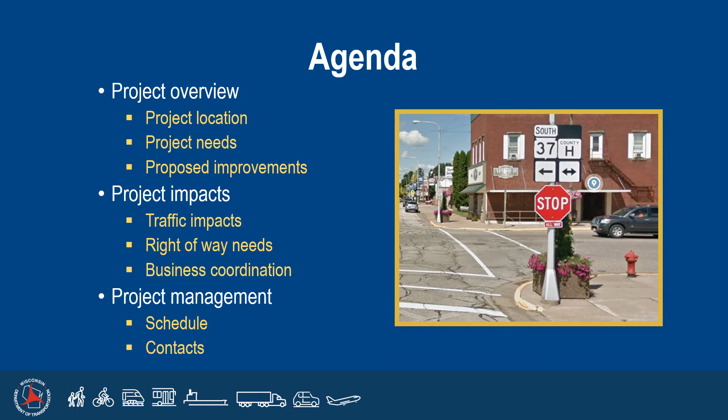The agenda for this presentation is as follows. First, we will start with an overview of the project, going over the project location, why the project is needed, and what improvements the project will include. We will then discuss the impacts of the project, including traffic impacts, right-of-way needs, and business coordination. We will wrap up the presentation with the project schedule and contact information.

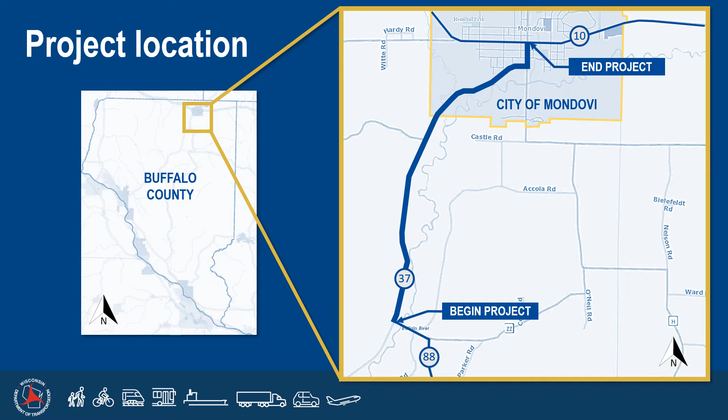The proposed project is located on Wisconsin 37 in the northeast corner of Buffalo County in the town and city of Mondovi. The project will begin at Wisconsin 88 and extend north to US 10, locally known as Main Street. The project is roughly 3.5 miles in length. The project is split into 3 sections, a rural section, which has ditches for drainage, and 2 urban sections, which handle drainage with curb and gutter.

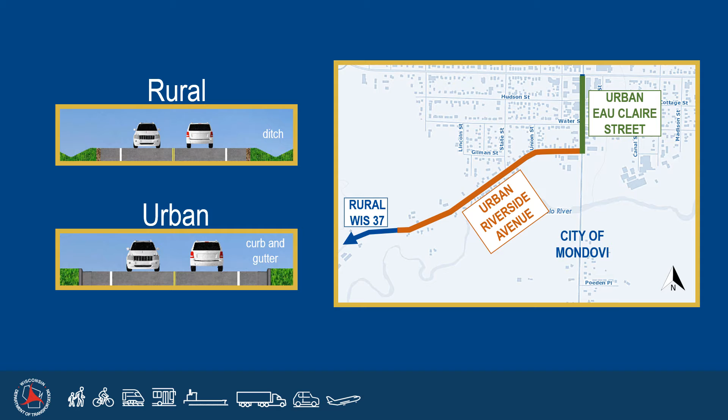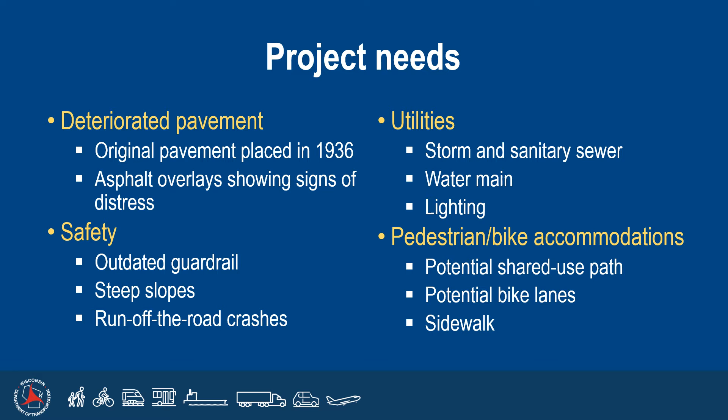The primary need for this project is to address the condition of the deteriorated pavement. The original pavement was placed almost 90 years ago in 1936. Over the years, there have been multiple overlays and maintenance projects, but the pavement is at the end of its service life. In addition, there are several safety needs. The existing guardrail is outdated and should be replaced, and steep slopes along the rural section need to be better protected. There is also a history of run-off-the-road crashes along the rural stretch of the project. Widened shoulders and rumble strips could help reduce the potential of these crashes. Other needs involve replacing the underground utilities and lighting in the urban sections of the project, and addressing safe pedestrian and bicyclist accommodations along Riverside Avenue and Eau Claire Street.

Next, we'll discuss the proposed project improvements. Some are still being evaluated and may or may not be included in the final design. In addition, design elements within the City of Mondovi are still being discussed and considered by the city. To address the needs of the project, different improvements will be included in the different sections of the project. In all 3 sections, the existing pavement will be replaced with concrete pavement. Along with the pavement replacement, the rural section, which is just over 2 miles, will include widening the paved shoulders from the existing 3 feet to 5 feet, adding shoulder rumble strips, installing new guardrail, and regrading the slopes at various locations.

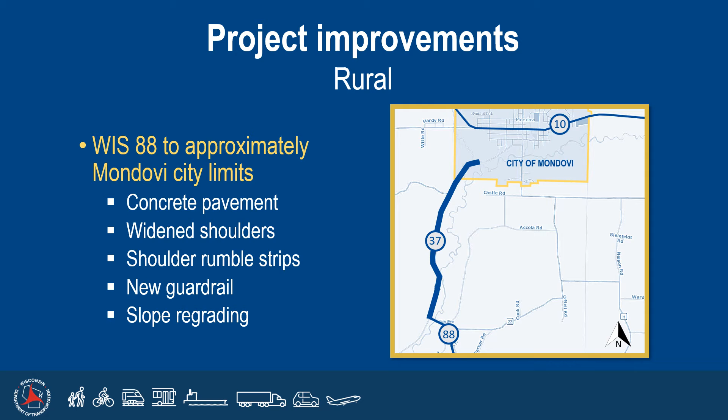The next section is the urban section along Riverside Avenue, which is just over 1 mile in length and begins at the approximate city limits and ends at Eau Claire Street. Along with the pavement replacement, curb and gutter will be replaced and a potential shared use path is being proposed along the south side of Riverside Avenue. The shared use path would provide improved pedestrian and bicycle accommodations and connectivity with the city. To make room to incorporate the potential shared use path, the roadway would be shifted within the existing right-of-way, and the existing parking lane on the south side of the roadway would be removed.

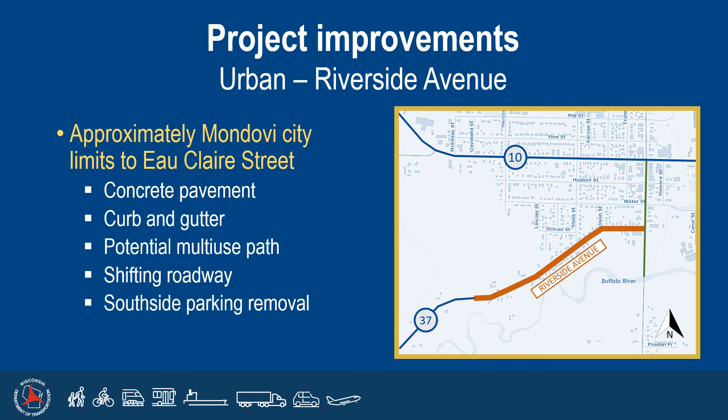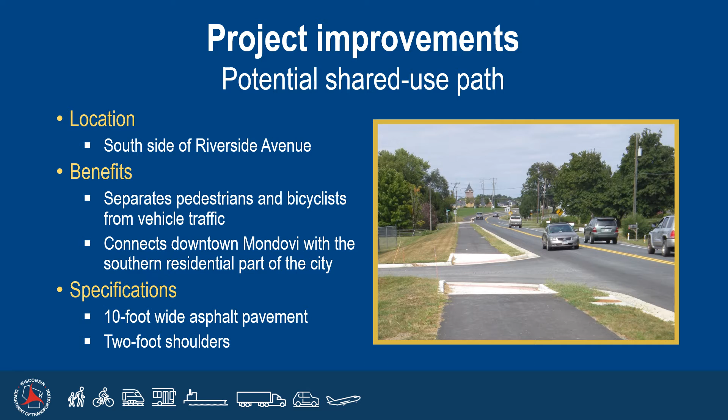The implementation of a shared use path would provide a safe accommodation for pedestrians and bicyclists that is separated from vehicle traffic. It would also provide better connectivity between the southern neighborhood and downtown Mondovi. The proposed path would be a 10-foot wide paved asphalt surface with 2-foot grass shoulders on both sides.

The last section of the project is the quarter-mile urban section along Eau Claire Street. Along with the pavement replacement, curb and gutter would be replaced, potential on-road bike accommodations would be included, and the intersection of Riverside Avenue and Eau Claire Street would be updated to better accommodate truck traffic. Currently, the only place along Eau Claire Street without sidewalk is on the east side between Riverside Avenue and Water Street. Sidewalk may be added along here. In addition to sidewalk along this section, bump outs are being considered.

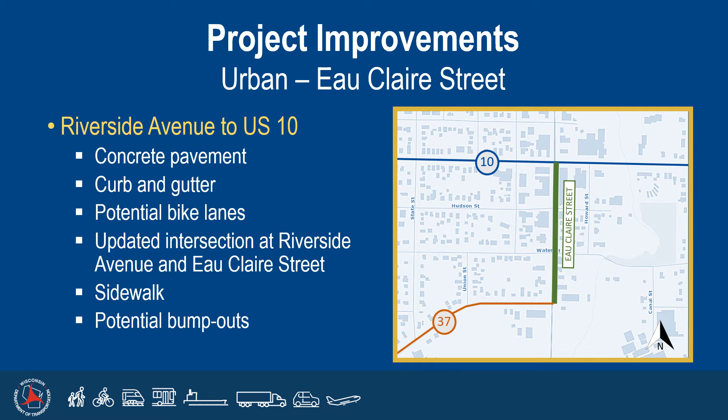The considered bump outs would be located at two intersections, Water Street and Hudson Street. A bump out is essentially widened sidewalk areas that create safer crossing conditions for pedestrians. Having a bump out provides pedestrians a refuge while they look for a gap in traffic to cross the road.

Bump outs extend out far enough that pedestrians waiting to cross are not standing behind parked vehicles. This makes pedestrians more visible to drivers at intersections and also creates a shorter crossing for pedestrians, lessening the time spent crossing the road and being exposed to traffic.

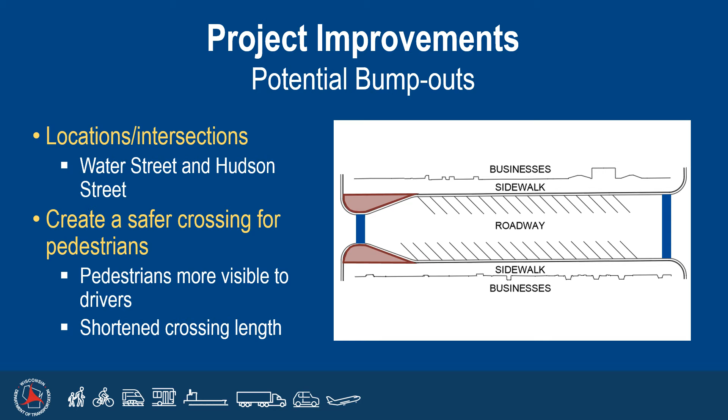The proposed project will be constructed in one construction season and is currently planned for 2025. A detour is planned for this project to allow for a safer work zone and to help shorten construction time.

Access will be maintained for residences and businesses along the project, but some short-term restrictions will be required for construction operations. These short-term closures will most likely be for utility installations and concrete cure time. During construction, property owners and businesses affected by short-term closures will be notified in advance to plan accordingly.

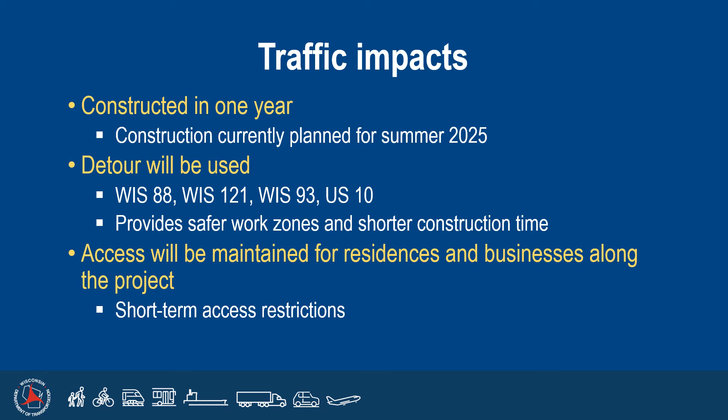The proposed detour follows the path shown in dashed blue using Wisconsin 88, Wisconsin 121, Wisconsin 93, and US 10.

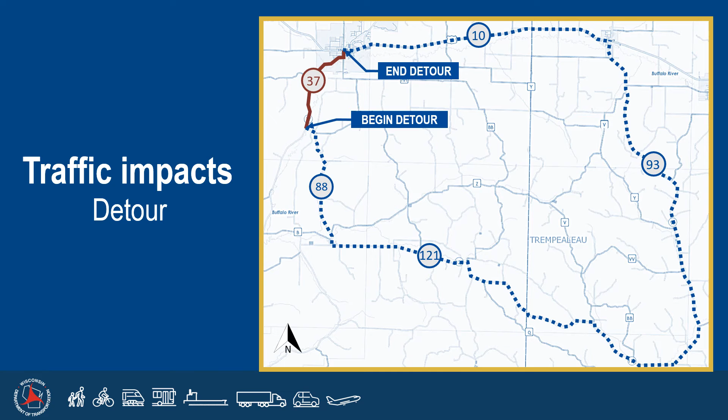The proposed improvements will require right-of-way in the form of either temporary limited easements, TLEs, permanent limited easements, PLEs, or permanent acquisition, sometimes referred to as fee acquisition. These right-of-way needs differ depending on the situation. TLEs are temporary and only required for the duration of the project.

The land remains the property owner's during and after construction, but the TLE grants contractors the right to perform work on the property in these areas. TLEs, which are the primary right-of-way need for this project, are required to tie in or grade the ground near construction disturbances. These are primarily required at the back of sidewalk, shared use path, or driveways.

TLEs are also acquired when there may not be any disturbances or work performed on the land, but access is required so the construction activities can be completed. PLEs are permanent interests in land and may only be required in a few locations. The land acquired by a PLE is still owned by the original property owner during and after construction, but will have restrictions placed on it.

For instance, if required for storm sewer, the property owner could not remove the storm sewer pipe. In addition, PLEs provide for access in perpetuity, meaning if WisDOT needed to maintain the storm sewer, the agency would be able to access the storm sewer without having to obtain permission from the property owner.

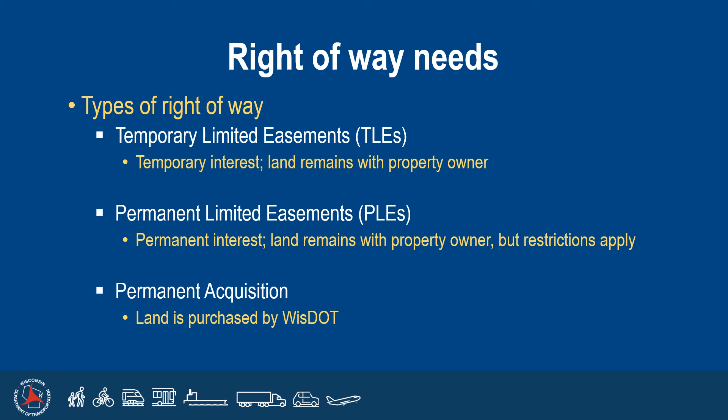Permanent acquisition, or fee acquisition, is where the land acquired will become WisDOT property. Fee acquisition is required when a roadway element is located outside the existing right-of-way, or the disturbance of the ground creates issues for the landowner. An example of this is when the sidewalk extends beyond the existing right-of-way, or the grading of the ground is too steep for a property owner to maintain or mow.

There are many businesses along the project. Impacts due to construction may occur, so WisDOT has resources available at the listed website. The In This Together program provides a guide with tips, tools, and other resources so business owners can be prepared for construction. Things such as guidance on temporary direction signage to business fronts and communication of detours or parking needs for customers are included in this guide.

In addition, the guide includes things businesses have done in other communities to keep them connected with customers during roadwork. WisDOT believes the success of any project should go hand in hand with the continued success of the communities we serve. Business coordination is highly important to the process.

We cannot always promise a tailored solution, but we do strive to be attentive and help coordinate around issues or concerns that may arise. We ask that all businesses utilize the In This Together resource and continue to work with us on questions as they arise.

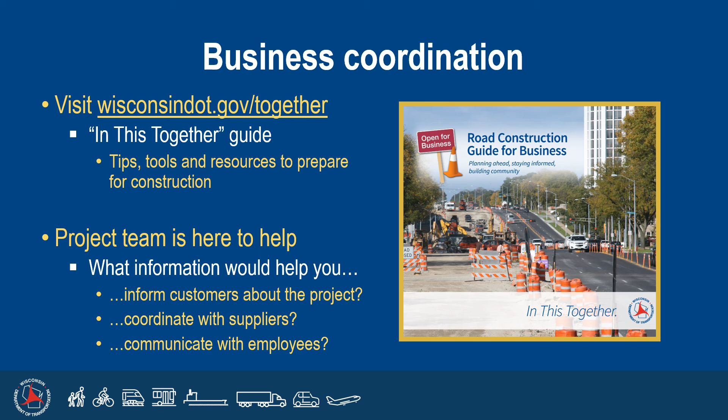The project has a couple more years of design work before it will be ready for construction. The project schedule is as follows. This year, preliminary design and the design study report will be completed. This is a document that summarizes the project improvements and design criteria. Once the design study report is signed off on, the project moves out of the preliminary design phase.

Design refinements will begin, and a second public involvement meeting will be held in 2023. Towards the end of 2023, real estate acquisition will begin. Real estate acquisitions will continue into 2024, and final plans will be completed. Once the final design plans are completed, construction is planned to begin in the spring or summer of 2025.